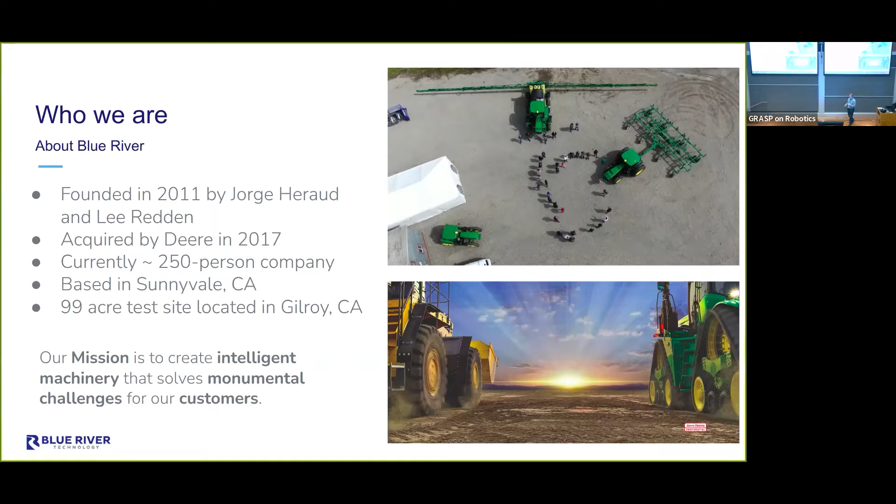I won't spend much time on this — it's just to give you a sense of Blue River. When we think about smart machines, we do a lot of sensing, decision-making, acting, and then learning also. So we do a lot of calibration, online calibration, validation of our work, so that when you spray something, you want to know, did it work? We've done a lot of work in that area. So it's this very big feedback loop with smart machines and data at its center.

Underlying all of this, probably no surprise to folks here, is computer vision, robotics, machine learning, deep learning — some of our core strengths and core focuses.

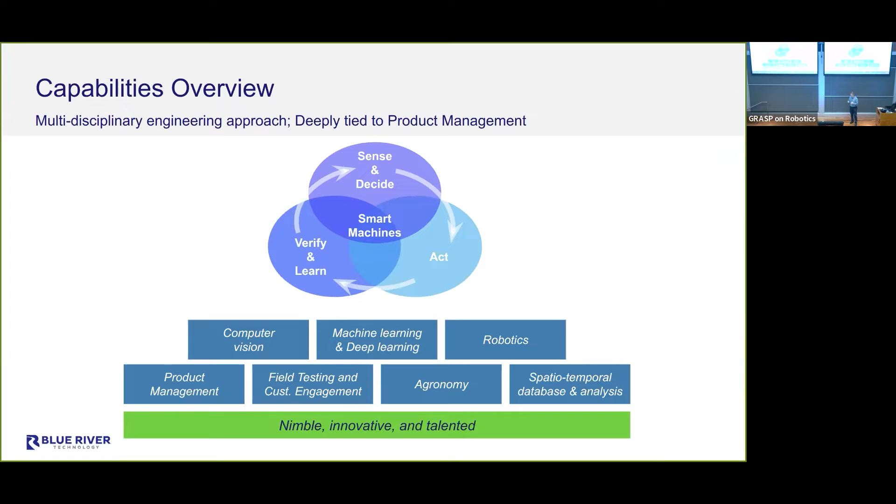But I'd also want to tie in one of the big things that I think makes us work well: product management. I don't think people think about that as much from an academic perspective, but in business and in developing these products, there's a very strong partnership with product management, who are kind of the voice of the customer, and the engineering side guiding that. That's been huge, and I think even for startup companies, it's one aspect that sometimes gets missed — having really good ties into product management. We also have field testing and agronomy, folks who get out in the field and understand the customer. We try to be very nimble, innovative, and talented. This is the group that we target.

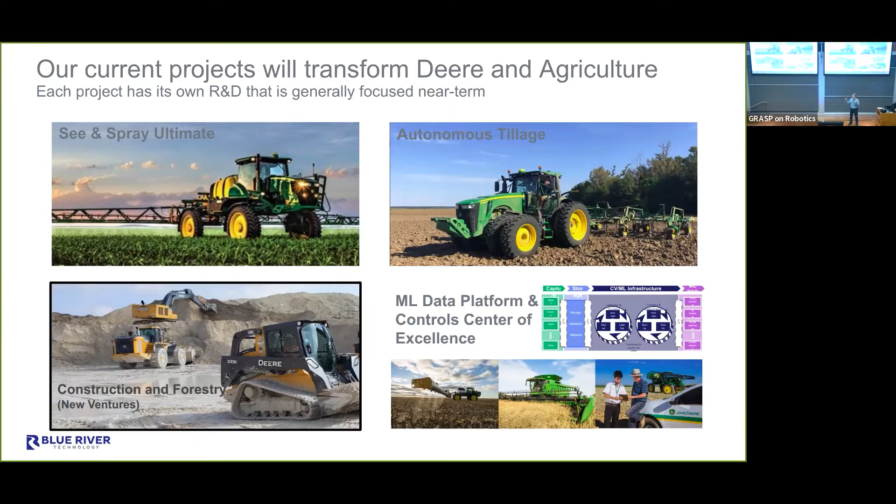Just to give a rough sense of what I want to talk about today: See & Spray Ultimate is a new product about spraying, and I'll go into more depth on that. Autonomous tillage is an actual autonomous tractor doing tillage, and we're getting into construction and forestry. I'll give some insights into that. All of these are based around a machine learning data platform and a controls center of excellence we have at Blue River. Machine learning is core to what we do, and the data infrastructure piece, while I won't go into it today, is really central to everything.

So let me jump into the first project I want to talk about: See & Spray Ultimate. It's a new product that we're releasing.

Before I dive into that, I want to talk a little about why agriculture, what motivates us to work in this area. Obviously, it's the food we eat - whether directly or indirectly, the food comes from agriculture - and the clothes we wear very often. Things like cotton are one of the big farming output products we work on. There's also the challenge that as population continues to grow and people move away from rural settings, we need to increase farming productivity.

Studies have predicted, and you see different numbers thrown around, that we may need to double farm output by the year 2050. But there are huge challenges to that: labor shortages, an aging farm population. The top right graph shows statistics on the aging farm population - people working in agriculture are getting older and older. There's also a shift away from working in agriculture and living in rural areas.

This bottom right graph shows some interesting trends. The blue line is the population of farm workers, which peaked somewhere around the 1920s-1930s. But as a percentage of the population, it's gone from 70% of people working on farms to, the numbers are hard to get exact, around 1 to 1.5% of the population working on farms. So you've got a massive drop-off in the number of people working on farms, and the amount of farmland isn't changing - it's been almost static for the last 20, 30, 40 years. So you don't have this easy way of increasing productivity on the farm.

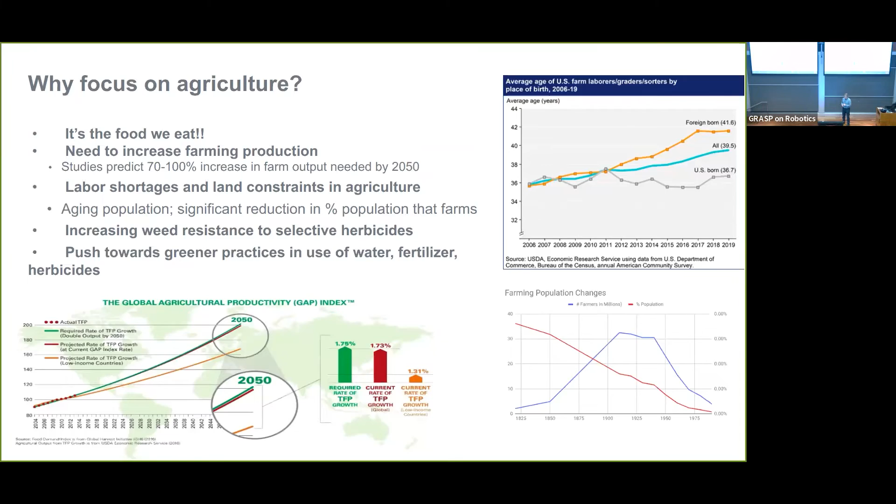So just to give you a sense of what happens today: the current standard practice for getting rid of weeds is genetically modified seeds combined with spraying the entire field - called broadcast spraying. You take a sprayer like this one and broadcast your herbicide everywhere, designed to kill all the weeds. The plants are genetically modified to be resistant to the sprays, so they survive, get knocked back a little, but for 20 or 30 years, this has been a really effective way to control weed populations.

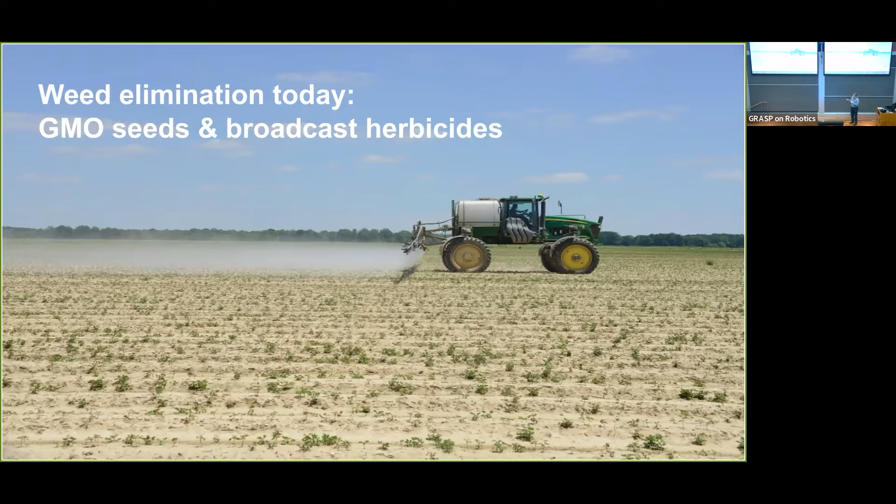Getting rid of weeds is important because they compete with your crops. But what we're seeing is huge growth in resistant weeds - through evolution, and sometimes through ineffective application of the materials, weeds are becoming resistant to the herbicides too. To walk you through this: in 1995, there was a handful of states that had these weed problems. By 2005, it's about half the states.

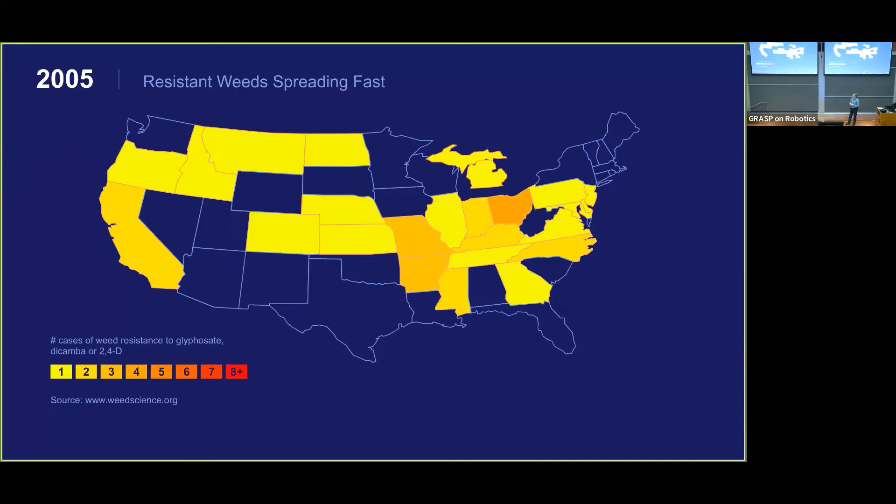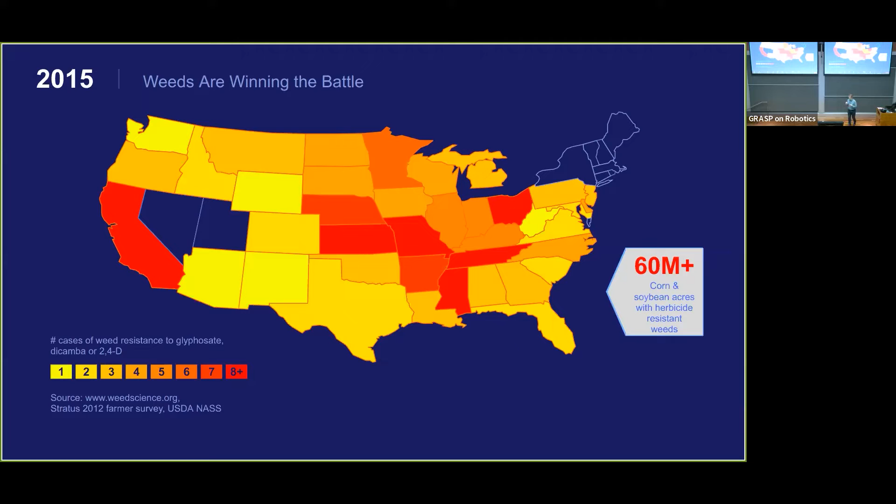In 2015, almost every state has these challenges. The hot spots, especially around the Delta in the southern region in California, show that this is just becoming a huge problem for farmers.

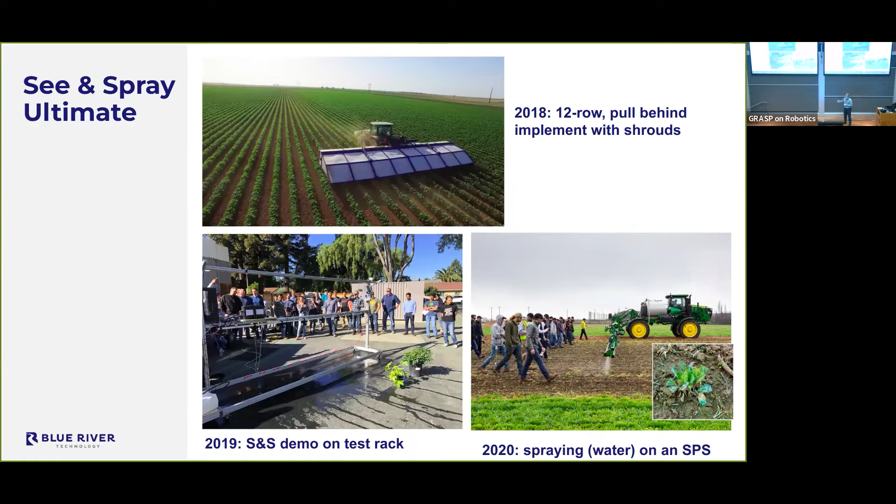It was pulled behind a tractor. By the next year, we were demoing something without the hoods, to be able to deal with sunlight and shadows. The next year, we were on a sprayer, no hoods again, spraying water and testing it out. And then we're now launching this project. It was launched earlier this year. It'll actually go into market early spring next year.

To give you a sense of the scale, this is a 36-meter wide boom, so roughly 120-foot wide. It drives at 20 kilometers per hour, so 12 to 15 miles an hour. It's got 36 cameras, one every meter, and 10 NVIDIA Jetson Xaviers, so a lot of horsepower on this thing.

They all had to be hardened, and that's also been a big project. Rujan was actually asking me earlier about whether we make our own hardware. Yes, we buy those chips, but we have to build the hardware that lets it survive in these types of environments. Our cameras too, we build those internally. It's also got a dual spraying solution, which is kind of cool, but I won't dive into it. It allows you to spray two different applications at the same time.

The thing that I really want to emphasize, though, is what we had hypothesized and what we're proving out: we see savings of anywhere from 50 to 80% of herbicide usage. So we're keeping that from being sprayed on the crops, on the ground, everything.

Great, how do we control the spray? There are nozzles that are solenoids that turn on and off. We determine when to spray based on vision, it's all computer vision. The amount is controlled through a solenoid that has a little nozzle tip, just a little actuator that turns it on and off, and then it sprays out of a nozzle. I have a quick video that maybe you'll be able to see.

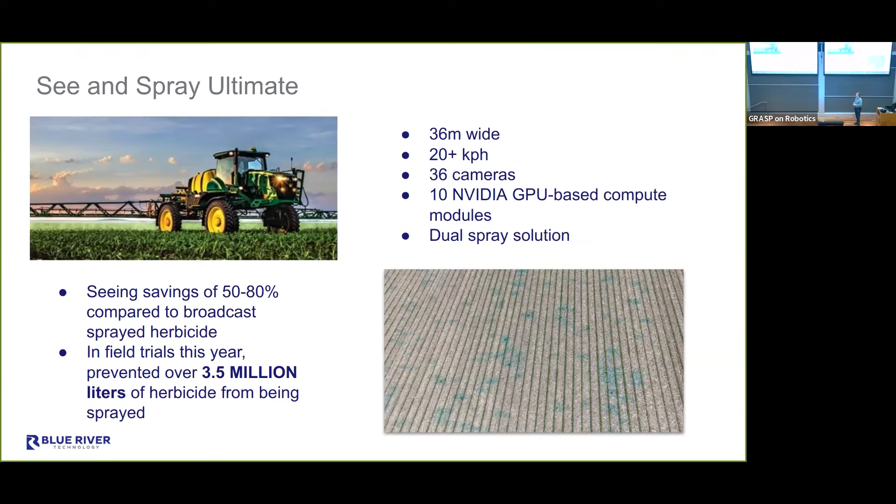You can't just do machine learning. In fact, I feel like most of our time is not necessarily on machine learning—it's a fraction of what we spend our time on.

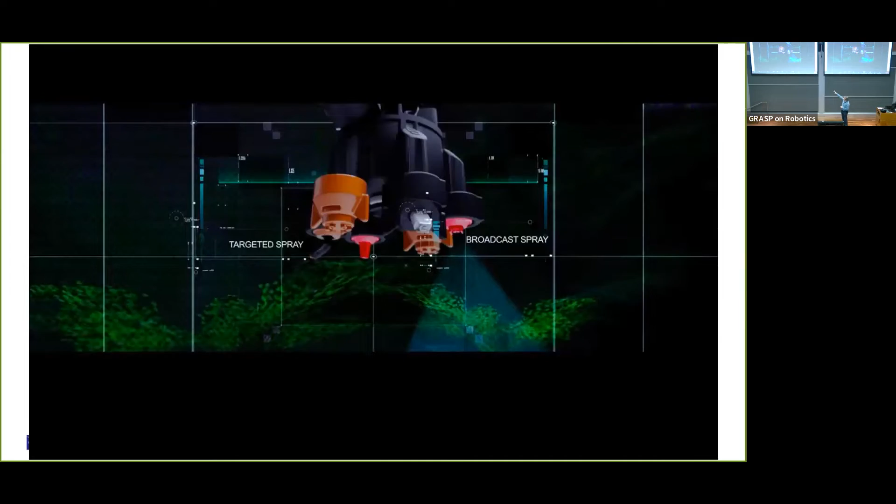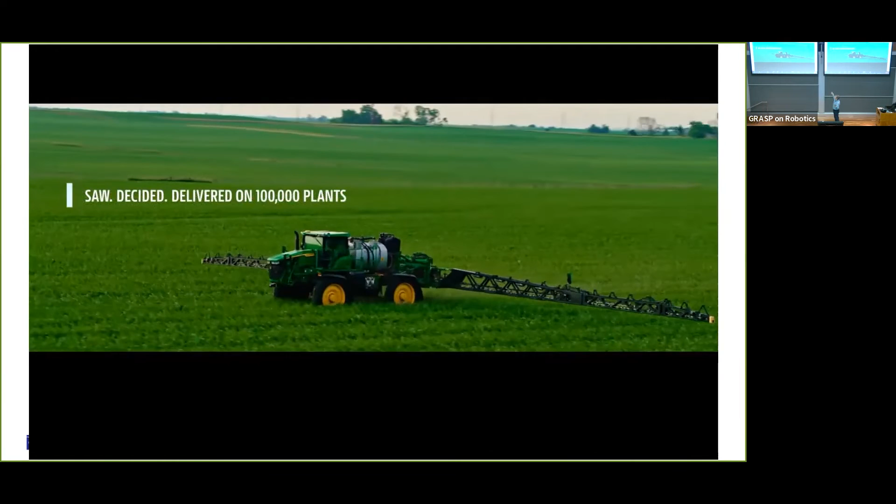This is a pretty quick snippet of video, but I wanted to give you a sense of what this looks like in practice and the scale. If you blink you'll miss it, but I wanted to show what the spraying looks like—this is it as the nozzles turn on and off. And I wanted to show the scale of the machine: it's a 120-foot wide boom moving through the field.

So let me talk about the tech stack some. This is why we're here—there's obviously not a lot of equations here. I can't publish all of the internals, but I wanted to give you a sense of what this looks like and some insights there.

We have this thing we call the See and Act Pipeline, SNAP—it was a little bit catchy. See and Spray is what we typically call the product. This SNAP pipeline has to run within 120 milliseconds total, glass to glass, we call it—actually, glass to ground in this case, from the time light enters the camera to the spray hitting the ground.

Actually, I think that number is when the spray is controlled and sent—it's another 70 or 80 milliseconds for the spray to hit the ground. So you can imagine all the compute we have to do is on the order of the same amount of time it takes for the spray to reach the ground. That's the compute budget we have.

A couple things I want to highlight: this is a flow chart of what happens, but we're doing full boom pose estimation—in real time we measure through GPS, IMUs, and ultrasonics the pose of the boom, so we know how high it is relative to the plants, because that controls timing. We're also doing inference on NVIDIA GPUs, mapping out where the plants are in real time, and controlling for a single compute module—there are 10 of these, and they'll control between 24 and 48 nozzles each.

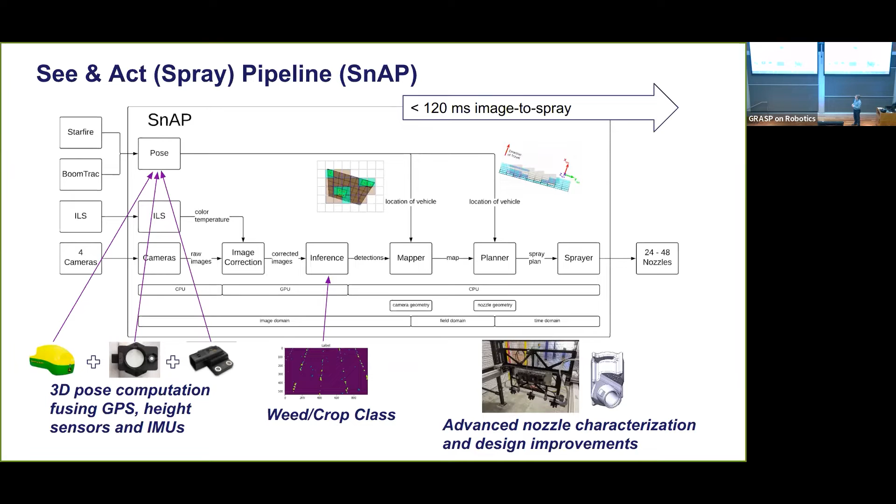It's a deep learning architecture—we couldn't do this without deep learning, I'm pretty convinced of that. We tried about 7 years ago to do it with traditional methods like SVMs, but the performance levels we got just weren't there. We couldn't get the high performance needed to detect all the crops, detect all the weeds, and then segment them from the crops.

A couple things to call out: it's what you'd expect—an image comes in, and we use a pyramid-type network that's not overly deep, 19 convolutional layers. I wouldn't say it's a very deep network, but it runs very fast, 8 milliseconds per image. And we have a training data set of over 300,000 labeled images at this point.

And they're all semantically labeled at a pixel level. So there was a big effort there to get that going.

I haven't talked as much about data collection. I'll talk more about it in the next project, but this isn't like 300,000 labeled images from a single field. We want diversity here, so this represents images from probably over 1,000 fields. We try to capture anywhere from 200 to 500 images per field, so it's probably closer to a couple thousand fields we've gone over.

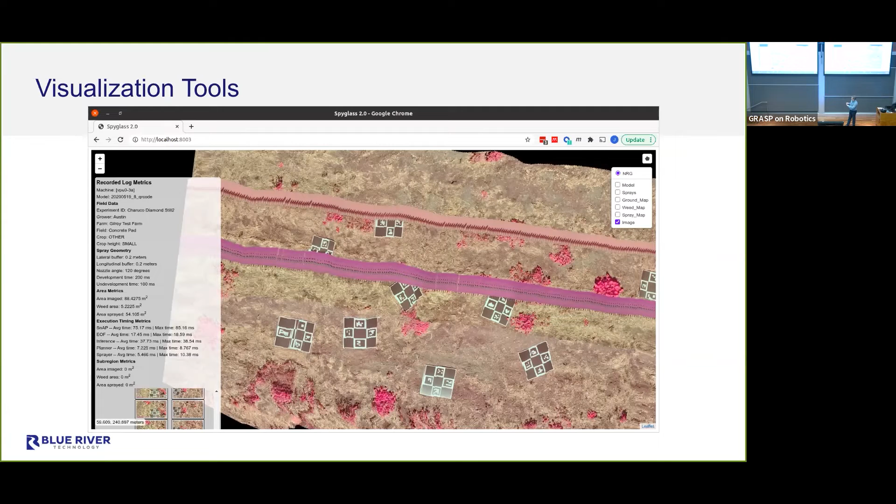We also built visualization tools. This is just to show—each image probably only covers a couple meter by a couple meter area, but what you can see here is probably a 20 or 30 meter by 20 or 30 meter snapshot of what the robot or machine is seeing. You can get a sense of the little tick marks along the pink and purple lines—those are actually images stacked on top of each other, just off enough that you can see the difference. You can see probably a couple hundred images going across there, and as you pull together what they're seeing, they're all stitched together to make sense.

Another thing that's been really interesting—we figured, hey, we've got this deep learning network, what can we do with it? Call it multitask learning, but that's a glorified way of saying we're going to pull a couple other things out of it. In this case, in addition to having our encoder that extracts and consolidates the data, we'll pull out whether there's too much dust in the image, too much blur, or too low light. So it detects image quality issues at the same time as it's extracting where the weeds are and where the crops are. That's nice because we've got the data and this machine learning model already doing all this work, so let's just leverage right on top of that.

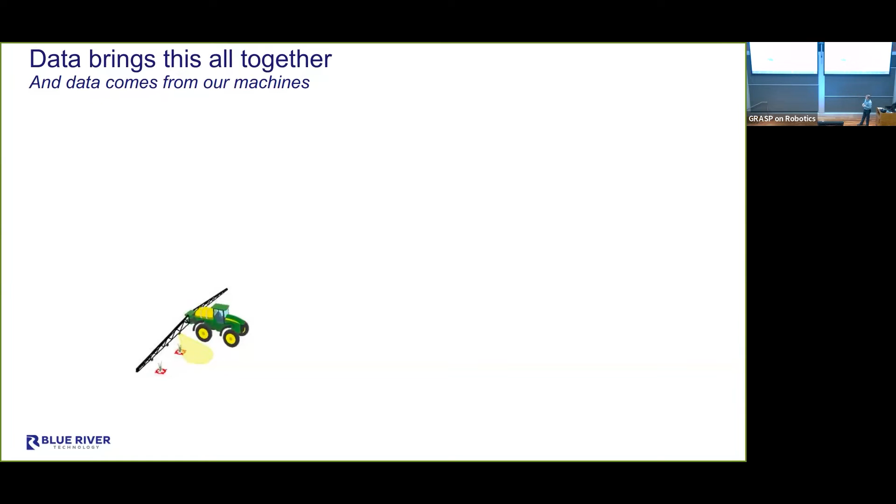And I keep mentioning data—the one thing I love about where this work goes is that data continues to make this product better, and not just this product, but other products. If you think about it, we're doing spraying today, and we can leverage data capture across a whole fleet of machines to get better and better and look for where there are problems.

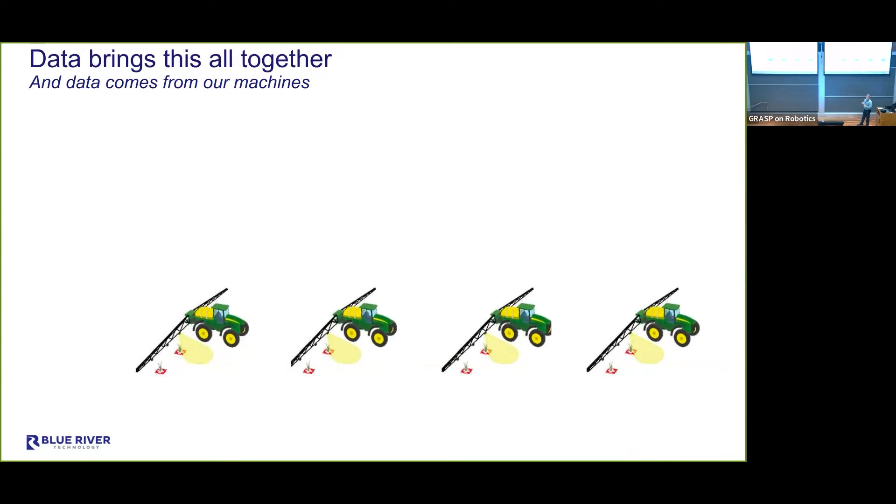And we can also then start to use these machines, which will go into the same field multiple times. So we can start to measure our performance, the first application versus second application, see how we did and get feedback that way. But Deere also has this whole fleet of machines doing other things. So planting, tillage, harvesting, fertilizing. So you've got this ability now to measure across an entire chain of the agriculture production process to see how each step is impacting the next and pull that all together all the way through harvest, and do that again on a large fleet of machines.

So the data, the ways in which you can use data, and we're starting to really expand on the data science aspects of what we do. It's just enormous, great potential. Okay, so that was See and Spray. Let me switch gears to talk about this autonomous machine and autonomous tillage.

So the data that you mentioned, am I right in assuming that you haven't open sourced it? No, we have not. Yeah, I do get that question a lot. I've had that fight a lot internally. I would like to. No. I mean, the simple answer is no. And I think, yeah, it's been a challenge.

I think we're continuing to look for opportunities of how we might do that. As you can imagine, maybe this is a little bit implicit, but I'll say it explicitly, it's this balance between having this data as a distinguishing factor in our systems versus wanting to get it out to the community and share it. And so I would like to, but we have not yet.

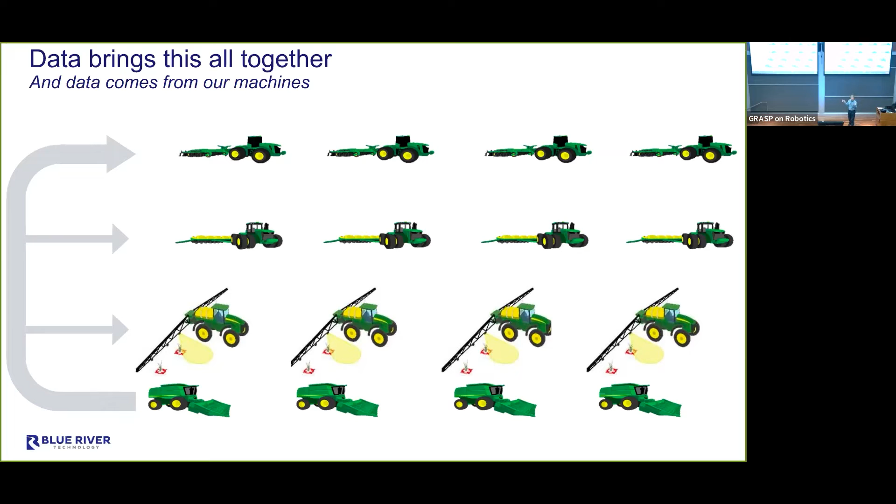Okay. All right. So again, let me jump over to autonomous tillage. I think this is also a really interesting area. In tillage, and maybe again stepping back, sorry, sometimes I forget that I'm so immersed in this. Tillage is an operation. Generally it's pulled behind a tractor, and instead of the single machine, it's got a tractor that pulls what's called an implement, usually some type of plow, in this case a chisel plow, that goes through and tills the field. It usually has some operations that help clear brush out, and then turns the soil and gets it prepared for planting for the next season.

We've chosen to start in tillage, and I think this is just interesting. If people are thinking about a product and how to approach product management and product marketing, tillage is interesting because it's a valuable operation for autonomy. It's a valuable operation that farmers need to do, but it happens roughly at the same time as harvest. So if you think about labor shortages, if they've got to choose between harvest and tillage, they're going to do the harvest every time, right? You've got to harvest your crops.

And so tillage is very often this thing that either gets lost or missed, but the farmers want to have, or they put their least skilled labor there if they can find it. It's also just a simpler problem around automation and autonomy. There's not plants in the field generally.

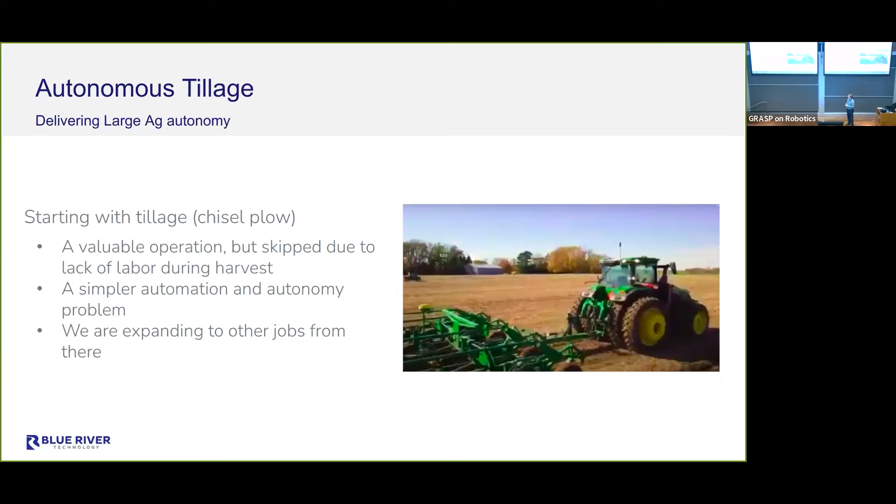I kind of mentioned this earlier, but it was announced at CES this January, and we're launching it and it'll be available as a product on Deere machines. Again, this is all through Deere this next spring for model year 23. These are just some pictures to show you what it looks like running. I'll show a video in a second. I love this one on the bottom right, which is how it operates at night, because they operate very often at night. So you can see the lighting patterns that go on there.

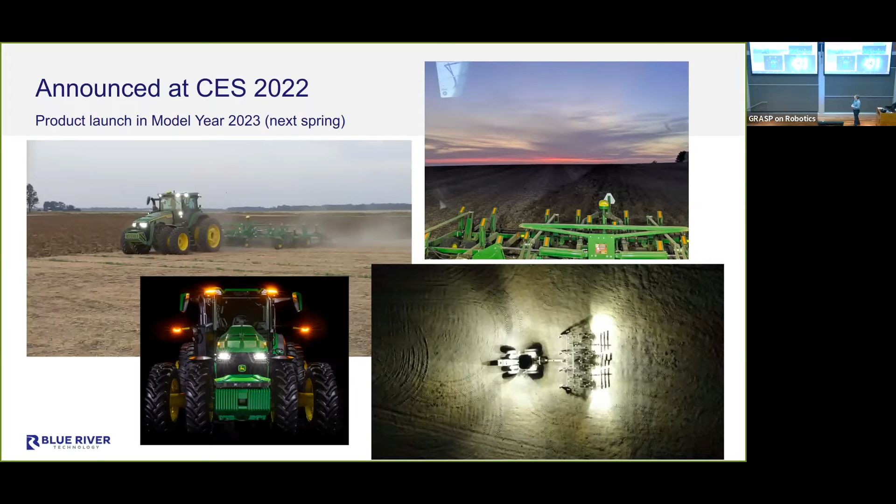And then I mentioned data collection, and I thought this was a fun picture to show. These are some of our data collection rigs where we've retrofitted a Gator, which is just a golf cart type vehicle, to be able to collect data. What's interesting about this is they need to be able to compress down for shipping, but then they transform out to have the cameras and the lights and everything placed where a tractor would have them. We nickname them transformers, where they can extend out and collect data. That allows us to get into lots of different fields, lots of different situations very quickly, rather than trying to bring a tractor to every field.

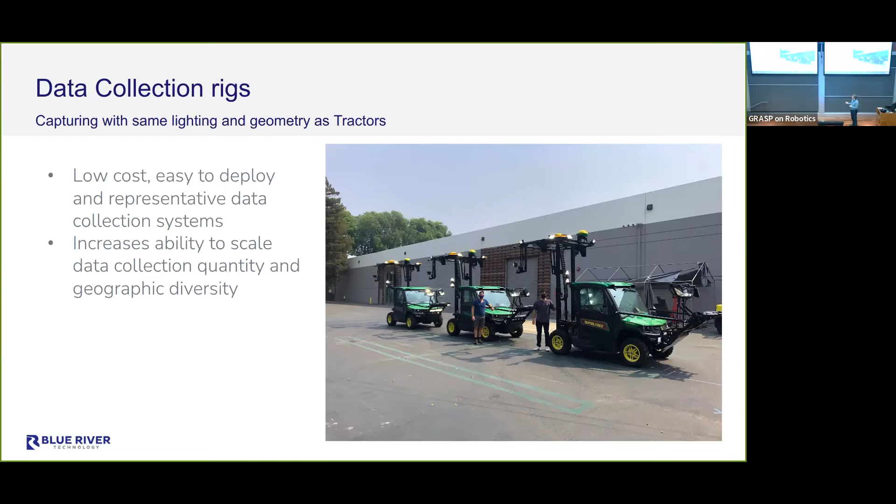And we've done this to collect data with See and Spray, even with just backpacks, people wearing backpacks walking through the field. But that's been a big effort of ours, to be able to collect data quickly in a diversity of geographic locations.

How do you supervise that model? Yeah, so the original versions were actually supervised by the stereo depth. But now we use unsupervised methods that use the estimated disparity between the stereo pair to train the depth model. So it's an unsupervised method.

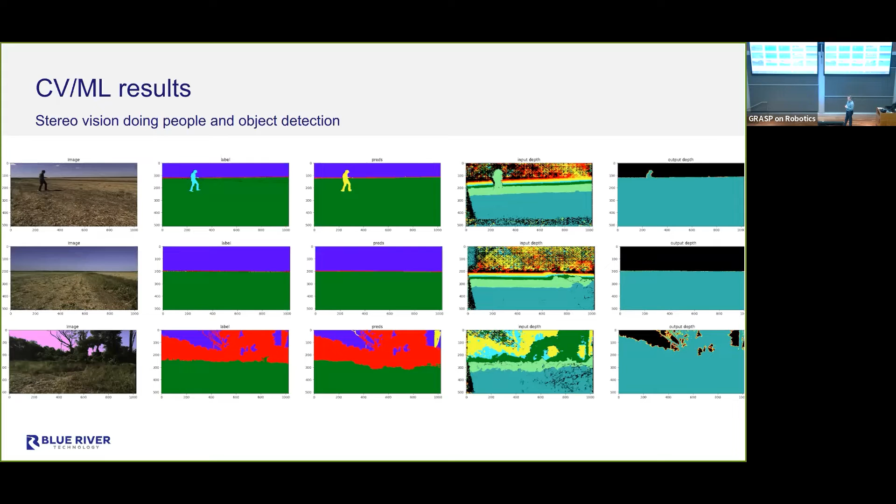There's a couple exceptions to that. One that still makes me laugh is bugs. Bugs come flying by and they get lit up by the camera and they look like an obstacle. So dealing with that has been an interesting one. And then dust. Glare that you get from dust can be a real challenge at night. So we've done a number of things to work on that and improve it.

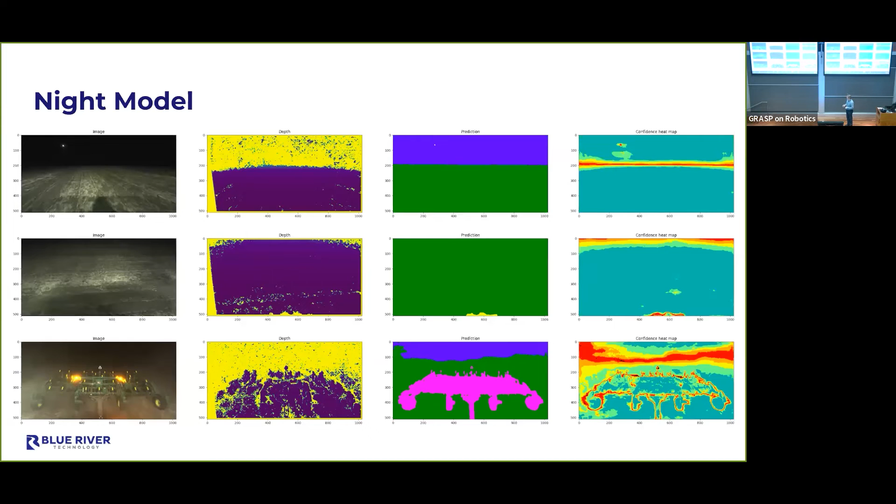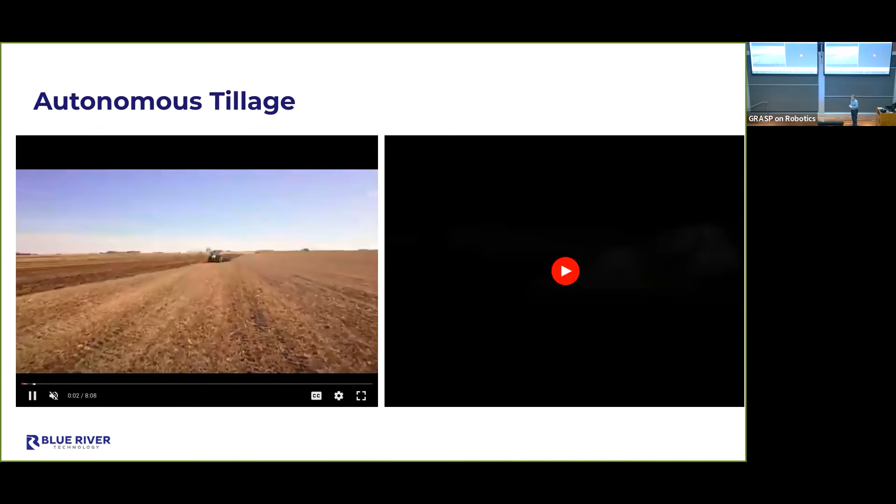And then just to show a couple of videos of what this looks like as it's running. It's actually kind of dull, and that's always the funny thing about autonomous systems, especially in farms. It looks just like a regular system, but there's just not a person in the cab, right? You just can't tell the difference.

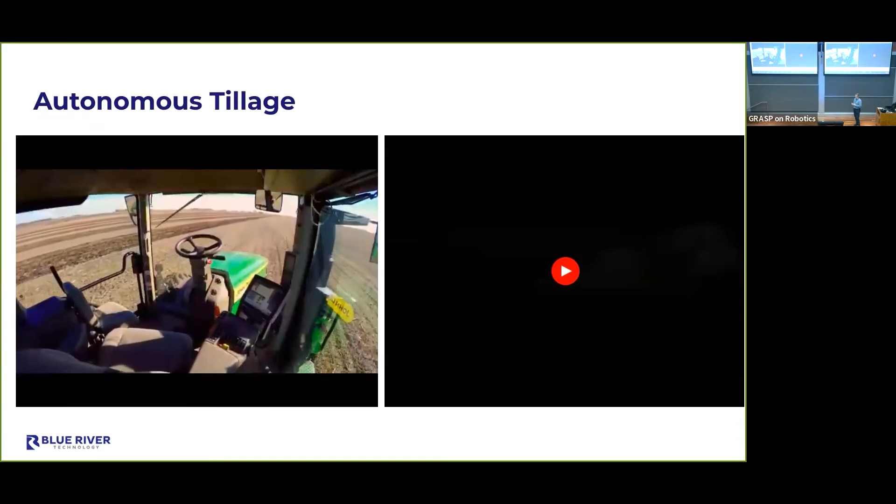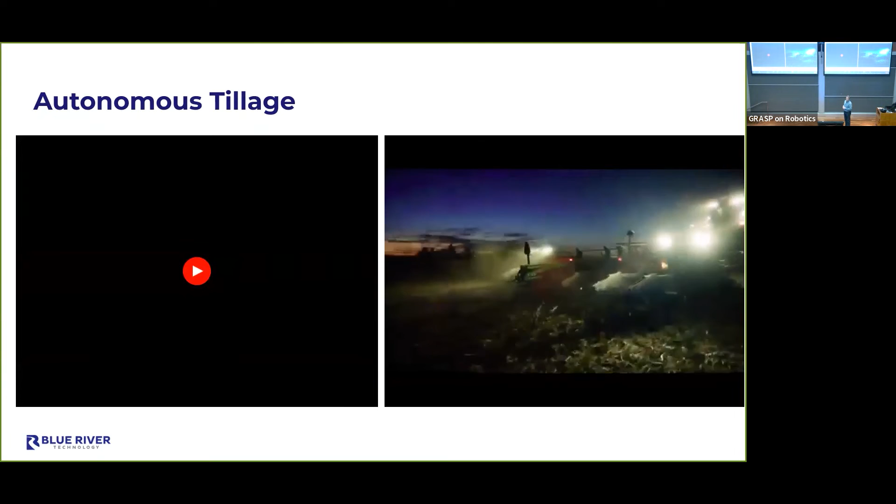So that's it running, and here's it running at night. You can see kind of how dust can be an issue there. Just one thing, and so dealing with that, figuring out how to do the lighting properly has been an interesting challenge, and we've incorporated a number of things to help reduce the dust, but also just understanding how to handle exceptions that get thrown when those happen. Start there.

How do consumers feel about the autonomy there, especially because machine learning has a reputation of not being understandable? You're not in the weeds with that technology y'all worked on. I'm sure you have plans and thoughts about this, but I'm curious what you've done to develop trust that they would want this technology, despite the fact that they may...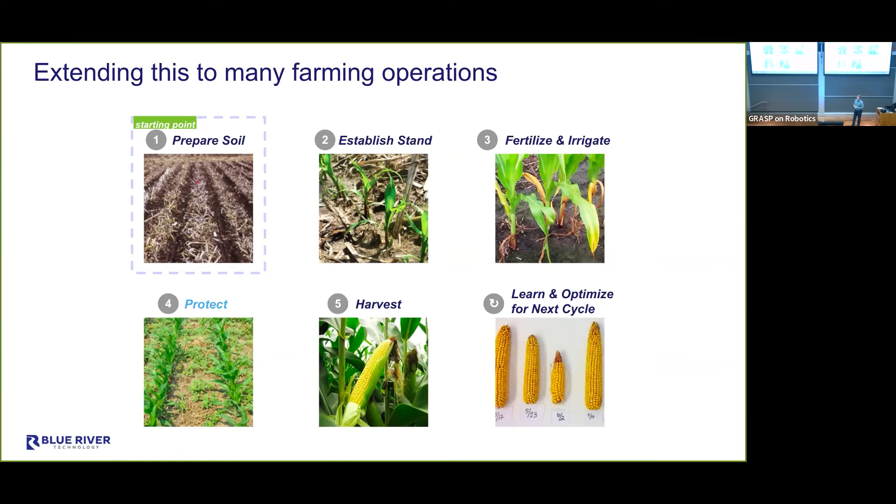The scenario we have that's our number one guiding scenario is someone got drunk, fell asleep in the field, and is in camouflage. They're laying down in a field in camouflage, and you're driving through that field. These accidents do not happen when a human driver is at the wheel, hopefully. Finding data on accidents in agriculture is really hard, but that's the idea.

Okay, now I want to switch gears completely and talk about something that is not going to market. This is one that I need probably a whole series of disclaimers to say, please don't do this at home. Don't try this. This is not something we're marketing, but it's fun, so I figured I'd share it. This is what we call a balancing skid steer.

It's one of the things we've been looking at in construction. It's a control project, so it's kind of fun that way. We've taken two approaches to this, and I want to run through both and compare and contrast a little bit: a deep reinforcement learning approach, as well as a model predictive control approach. So there's these two approaches, just to explore the space a little bit.

I probably should have showed the video first, I'm realizing, but anyway, I'll get to that. I want to give you a breakdown of what we've worked on here. We're using neural networks in two ways in this system.

One is to help us simulate the system and take something that's very nonlinear and help in the simulation. So we've done more physics-based modeling to get a primary base model, and then built a neural network effectively around that, especially around the controls and how the controls translate into action on the machine, to build a better simulator. Then we took that to train a controller, again this reinforcement learning based controller, that can control the machine and do the sim-to-real transfer.

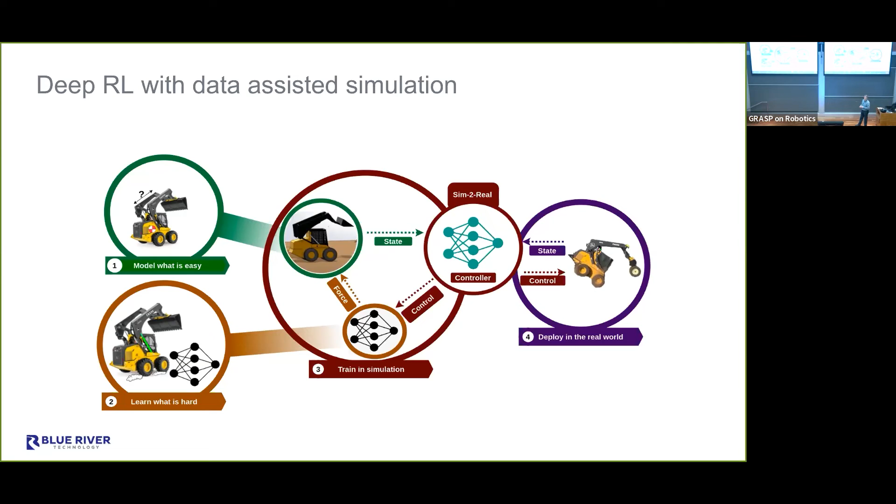So transfer that out to the machine. I've been really struck by how effective that's been. Once you get a good simulator, the controller transfers really well out to the machine. I'll talk a lot about that in just a minute.

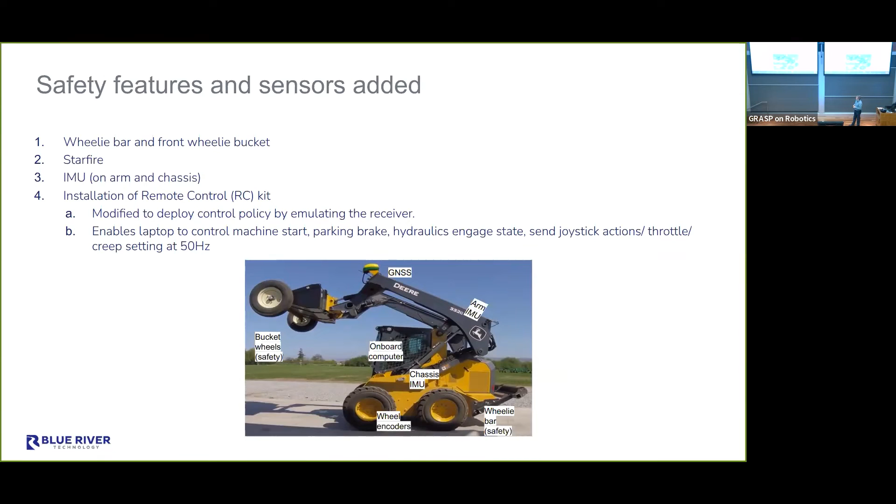We obviously had to modify the machine slightly. This is called a skid steer loader. It's compact, like a Bobcat if anyone's familiar with those, but this is a John Deere skid steer loader. We added a wheelie bar so that as this thing tips back and does a wheelie, it doesn't fall over, giving us a little safety on that side. We also replaced the front bucket with a set of wheels, and added an IMU, GPS, and a remote control kit so we can control this thing remotely.

I mentioned we do kind of a physics-based model. What's kind of fun is finding the inertial parameters on the skid steer. We had to balance it up, put it on a truck scale to find the center of mass and some of the inertial parameters. Then we built it into a simulator, just a physics-based simulator.

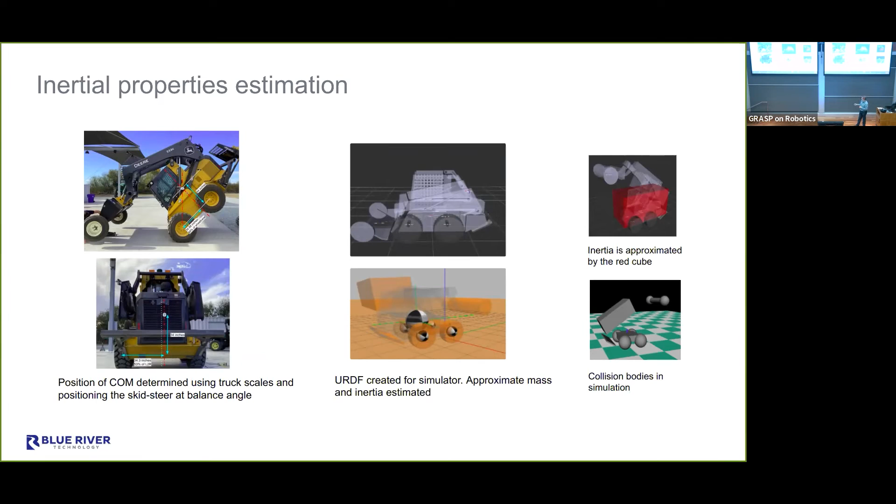We use RaiSim in this case because we're working with ETH Zurich. I should say this work was done with Lee Redden, one of the co-founders, and Marco Hutter out of ETH Zurich, who was also working on this. So it was a collaboration with those guys.

We then collected data around the actuator control and focused on the nonlinear areas that happen when you try to drive this machine, between what you command and what actually happens on the machine. So we ran it through essentially a sweep of inputs to test the input to wheel speed, wheel velocity, wheel speed state, and then built a neural network that could simulate that—that was the nonlinear area we wanted to capture. We then had to put a controller around the simulator to properly have it take wheel speed as a control input and drive the simulation to model that.

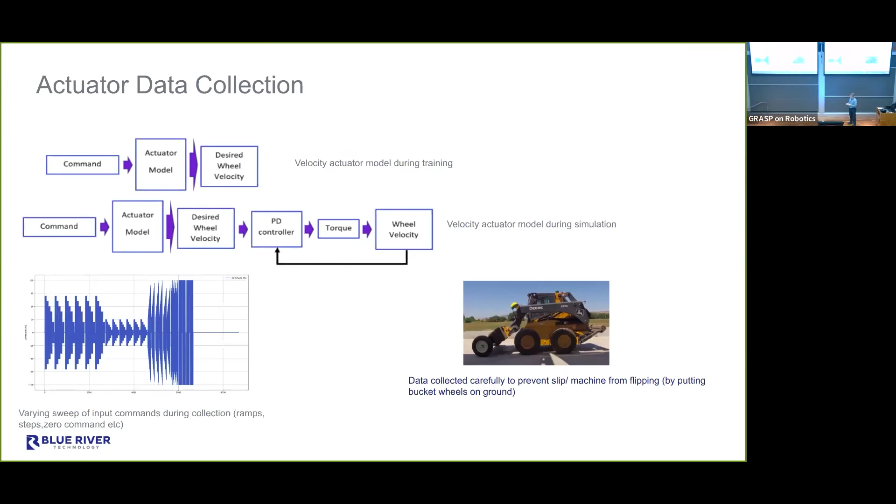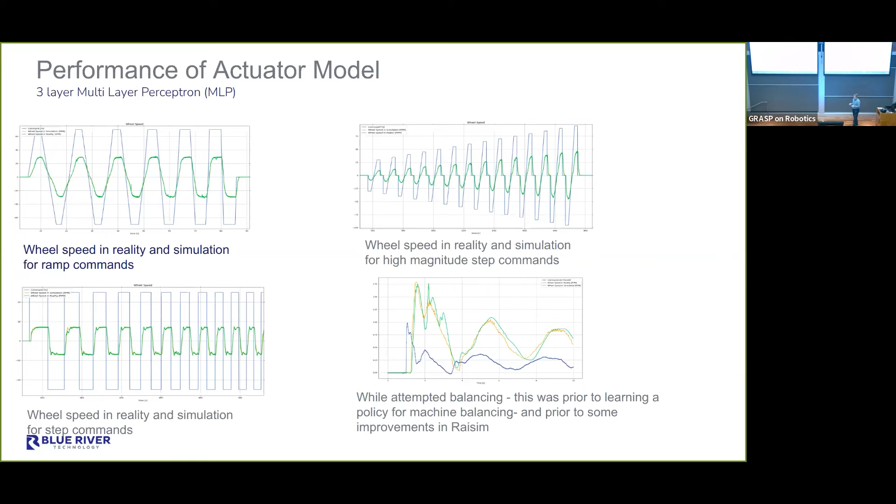This isn't a very exciting graph, partly because the simulator sits on top of the measurement. The blue lines are the control signals coming in, the green lines are the measured action, and underneath is a set of orange lines showing what the simulator said. You can see they sit right on top of each other in most cases, which was nice.

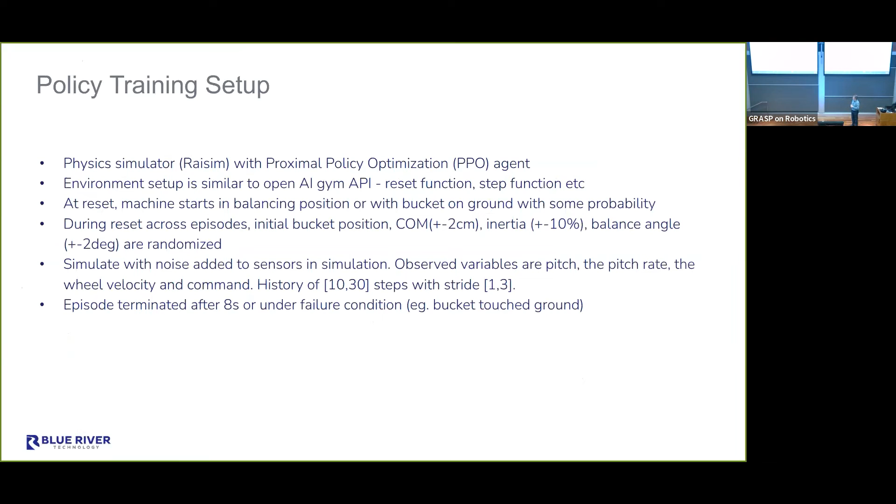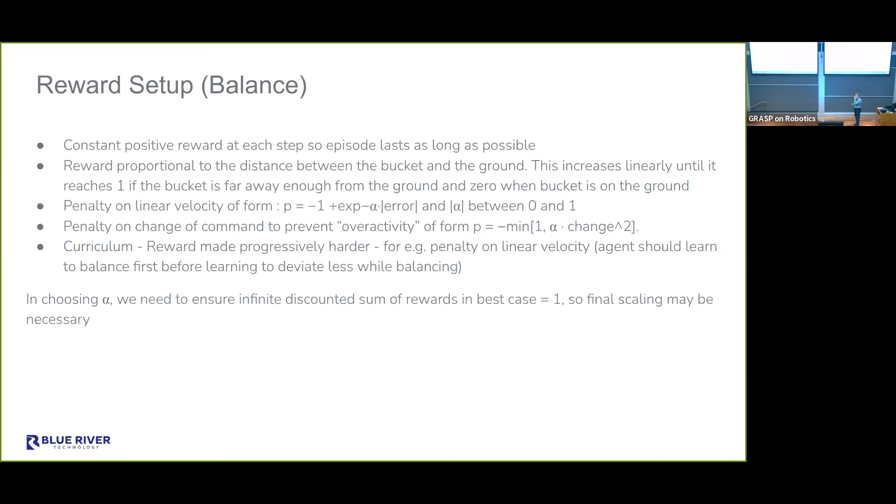We used this reinforcement learning setup, using PPO, proximal policy optimization, with the simulated environment. Over each episode we'd randomize some of the variables to give it robustness, adding noise and things like that. Building up from having it control the system to balance itself, to putting penalties on motion, control effort, and how much the control effort changed. Pretty straightforward in some ways, but obviously a challenge to get working.

Tying this all together, we have this controller able to control the system. One note is that the controller doesn't work from sitting on the ground all the way to swung up, so we had different policies trained for each state: getting the machine upright, and also landing it softly so it didn't destroy itself on the way down. Those are handled automatically by the system, but they're different controllers.

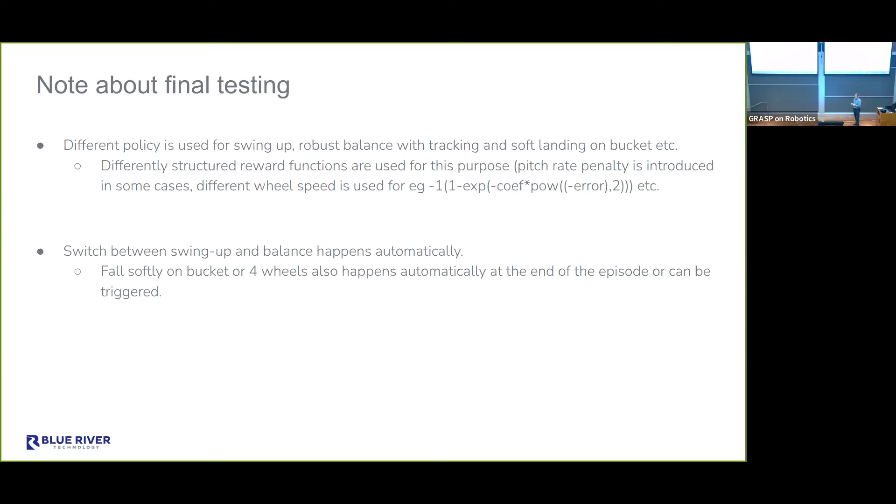Now just to show you what this looks like. On the right, I'll start this one up. This one's kind of fun but it's a longer video. We had it trace out on the field the word 'hello.' It's going to run for a while, and I wanted to show you how this thing pops up and gets into place. That's one control policy.

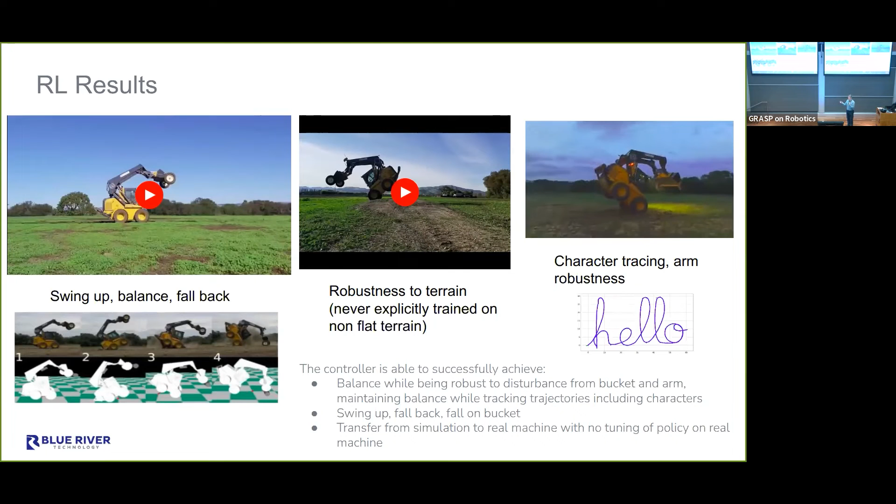Then it'll drive around, and maybe because that one's a little dark, I'll show this one instead. That will do basically the same thing, and it just kind of pops itself up.

Again, do not try this at home. There are no operators in the cab, and that's very important.

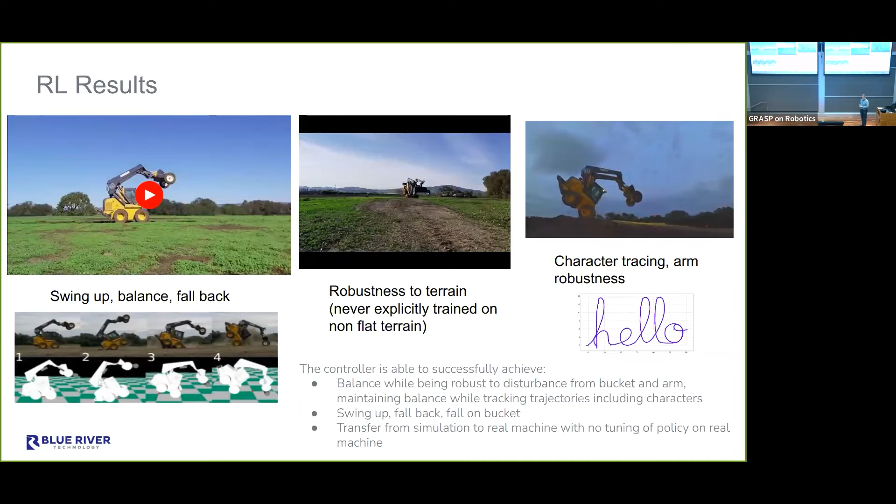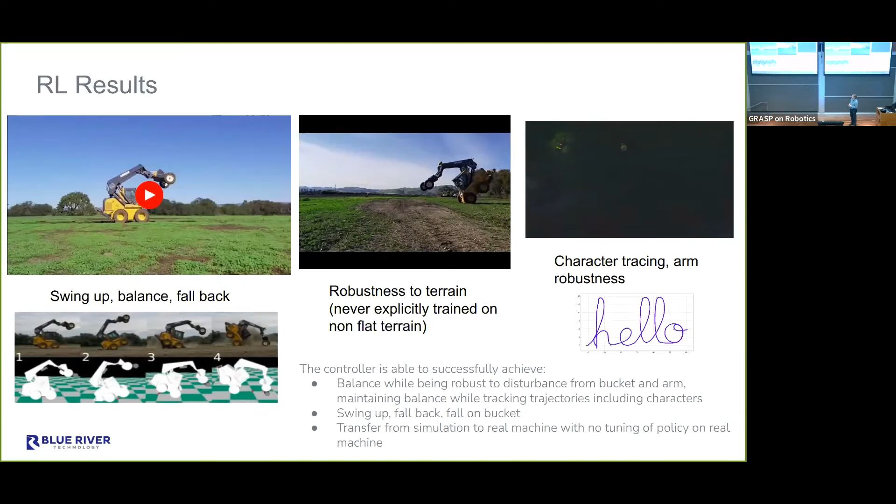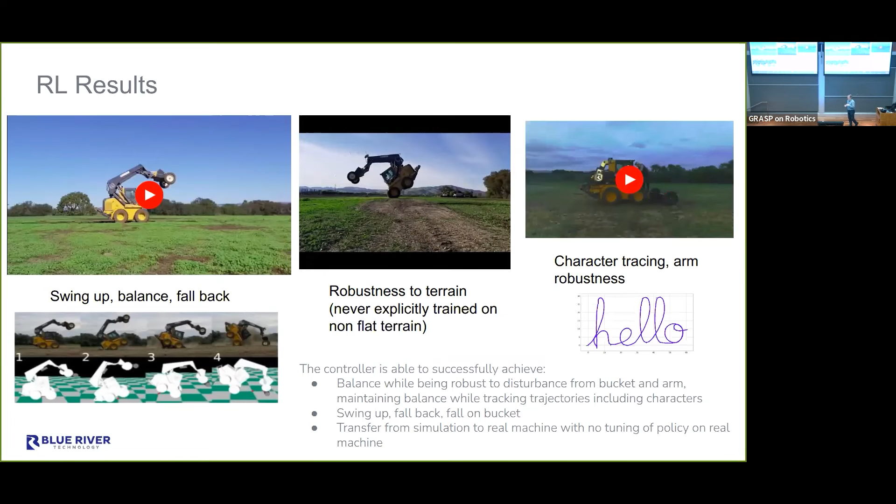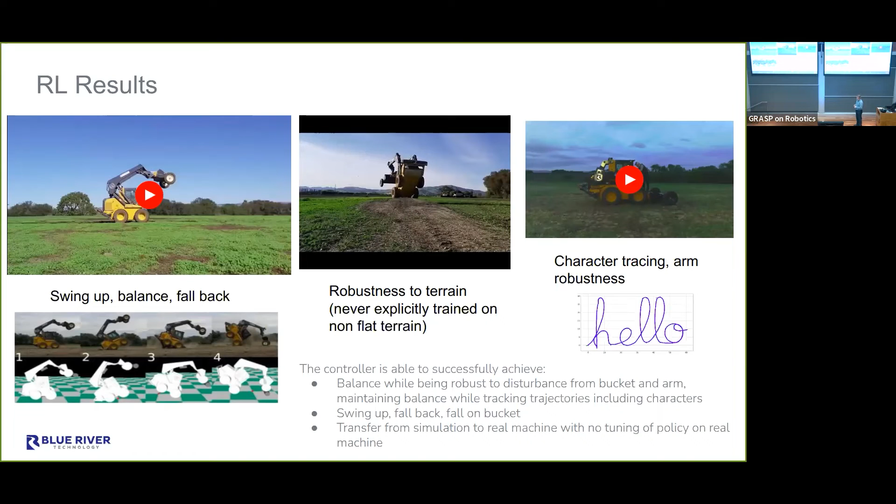One last point I want to emphasize is that the transfer from the simulation controller to the real machine had no retuning—it just transferred over. It's really pleasing to see that happen.

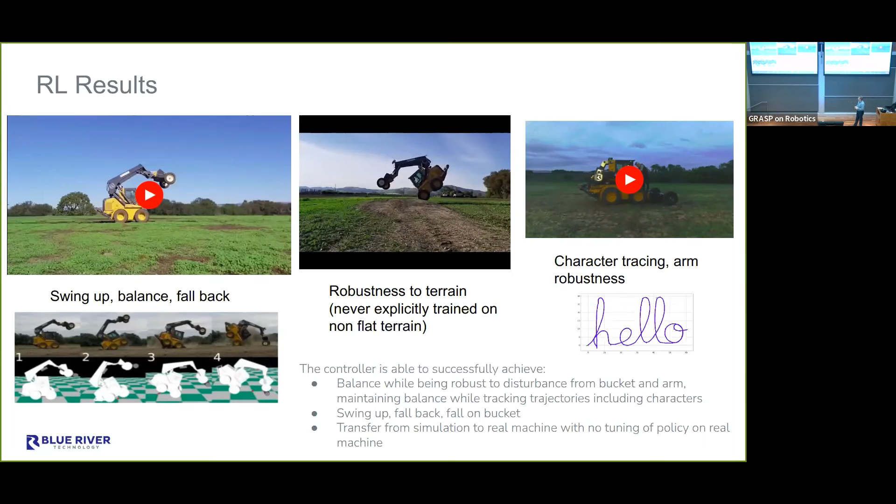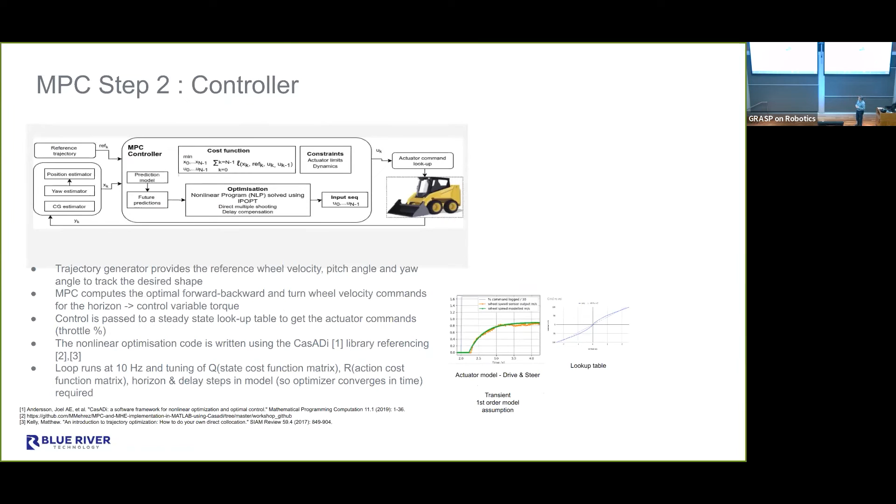I'll go through this quickly since we're running out of time, but the model predictive control approach is another approach we've taken. This requires a more thorough dynamics model to build out for the MPC, so we did quite a bit of modeling for that. We built the controller, which has a standard kind of optimization cost function that works on a fixed horizon, and it's able to build this controller for the same type of situation.

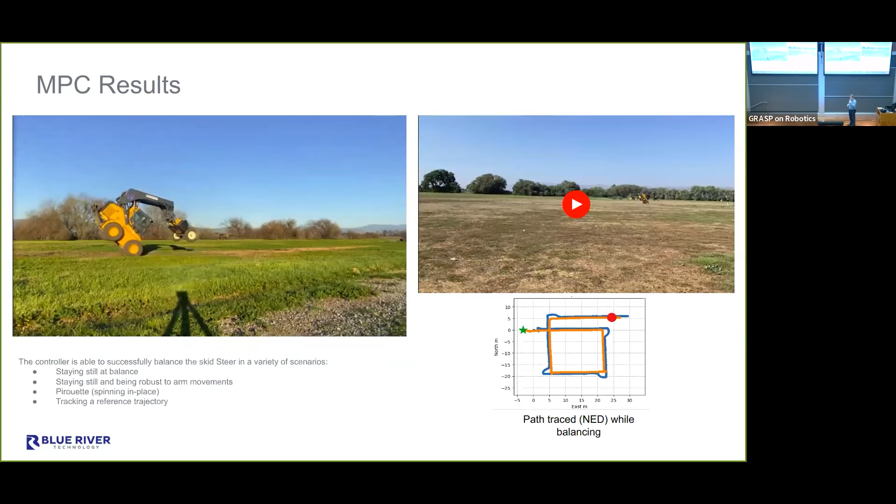Just to show some quick videos—they'll look very similar. This one starts in a slightly different position, but the idea is it's able to pivot up and control it, and you can do things like spin it or translate it. The second video shows the machine tracing out the diagram below, and you can see how that runs.

Yeah, so very dynamic system. I think I'll keep moving on with that.

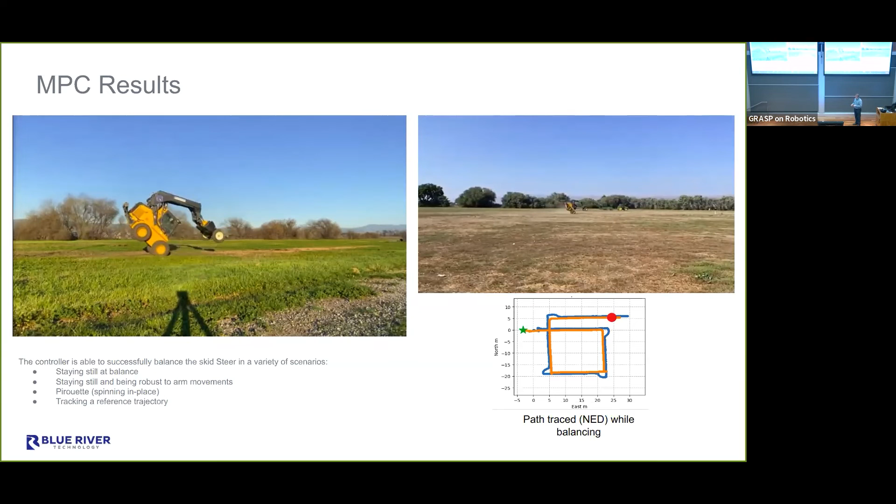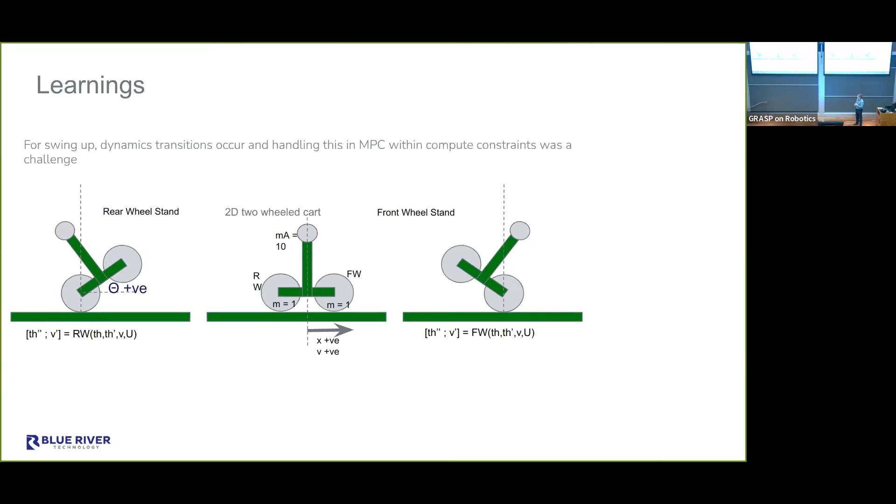Just to talk about some of the learnings from dealing with these types of systems and these two different types of controllers. Maybe to start with, MPC is great for dealing with balancing the system, but was much more challenging when the dynamics change. So having those dynamic constraint transitions proved to be a real challenge, and we weren't able to solve that, to be frank. Not that it couldn't be solved, we just weren't able to get there.

The reinforcement learning controls weren't as smooth as the MPC, and it could be just how we approached it. We added some first order filtering that got it much better, but just out of the box, it had that issue. The reinforcement learning was great for transitioning to slightly different tasks, but related.

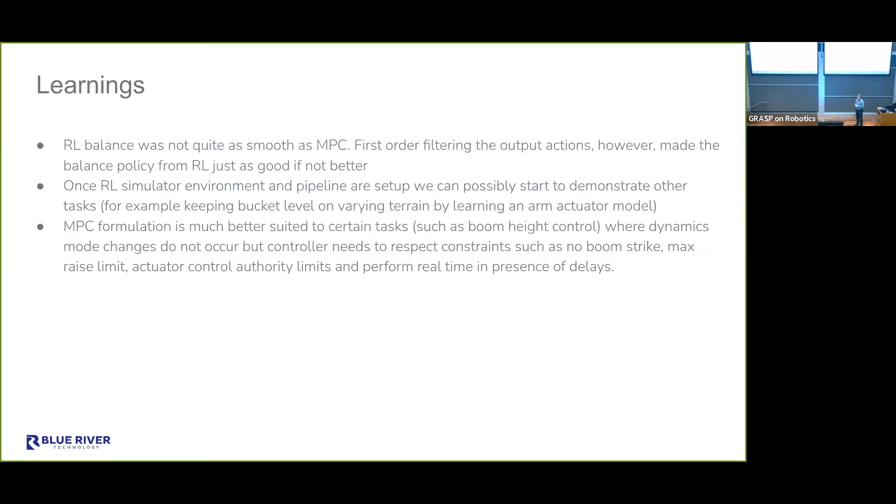So if you had the same model, but you wanted to control the bucket height or do something that was related, it was really nice for transitioning that. Where MPC wins in some ways is if you needed to add real hard constraints, limits that you wanted to enforce, that's much easier to do with MPC than it is with the RL. Just some comparisons there.

That's kind of those projects I wanted to mention, just looking forward. We've got a number of things, again, in construction and forestry, adding more and more safety to construction and forestry. Construction sites are really challenging. There's a lot going on. And the technology just isn't there.

It's funny, we've had operators who say, I feel much safer driving my pickup truck to work than I do in the construction machinery that is there. And it shouldn't be that way. And so Deere's working to improve that.

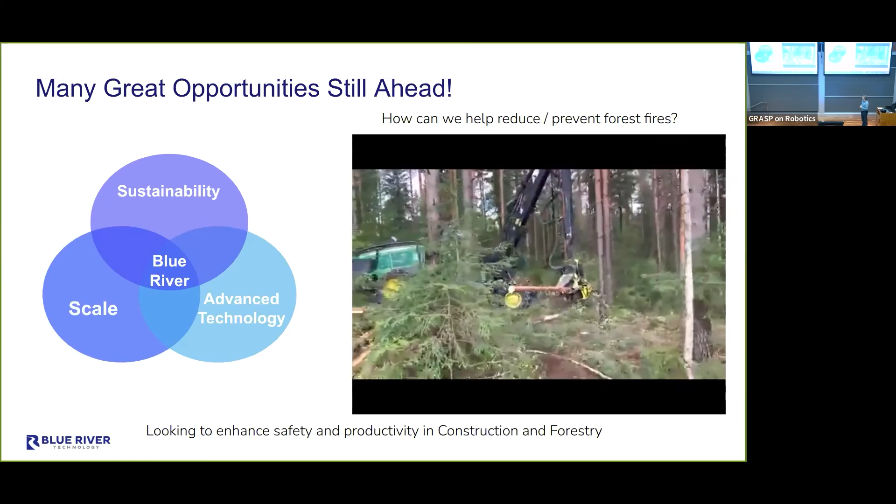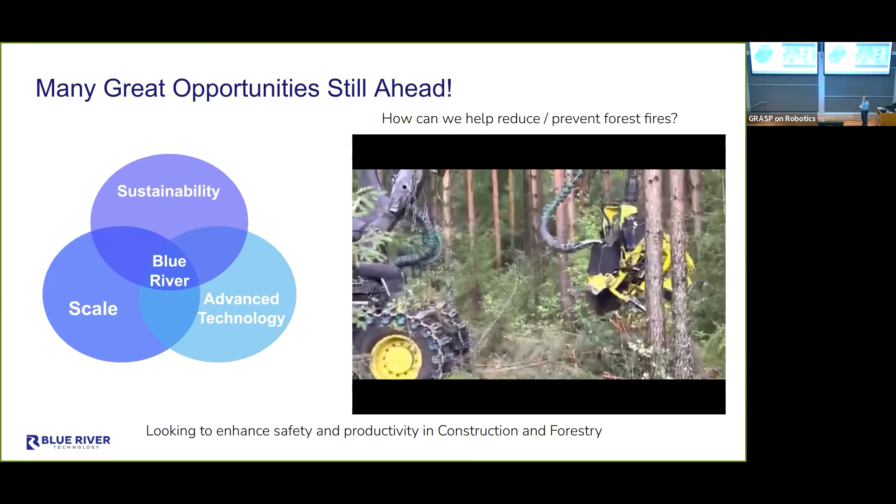I want to show this. This machine is an amazing machine. It's called a feller buncher, that is able to grab the tree, cut it, and then cut to length the logs that can be then later harvested.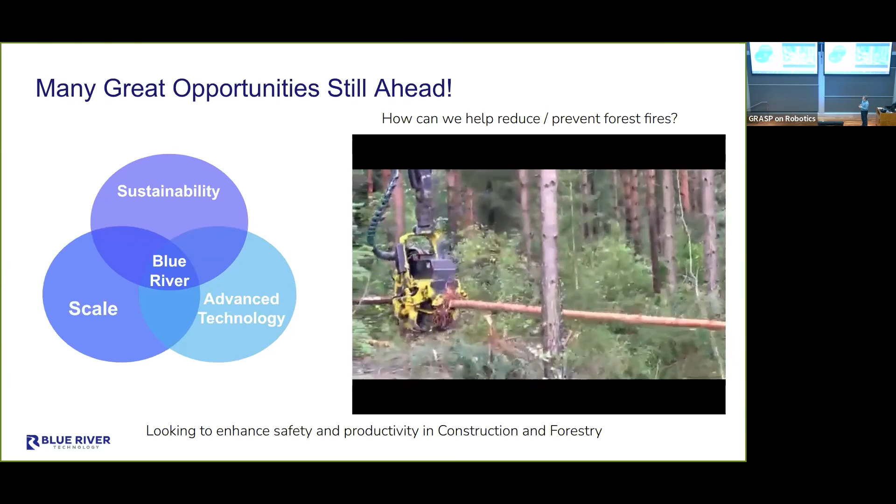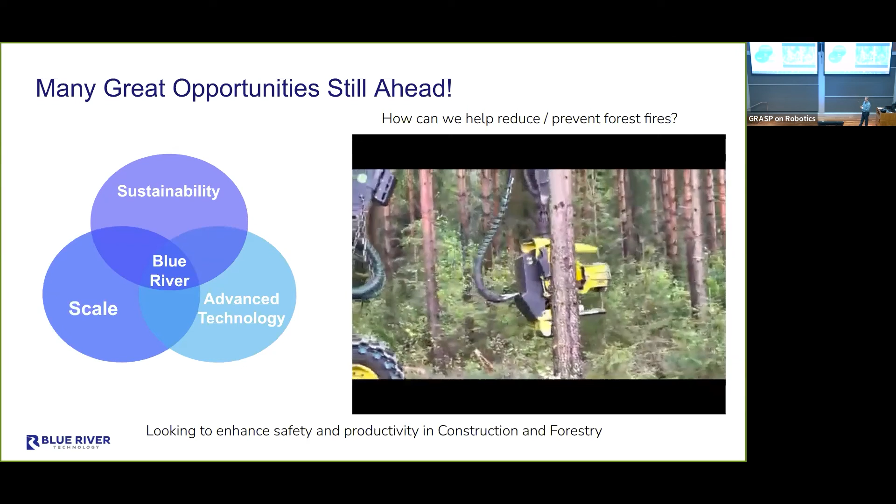But what I want to call out here is, I don't know if this will relate for most people, but I have visions of the Lorax here, and I'm a little bit uncomfortable at times looking at this. But forest management, when you do it right, allows the trees to be healthier, allows them to be more resistant to fire. So we think about forest management more around thinning than clear-cut logging. It's about thinning the forest so that the trees that stay there are healthier.

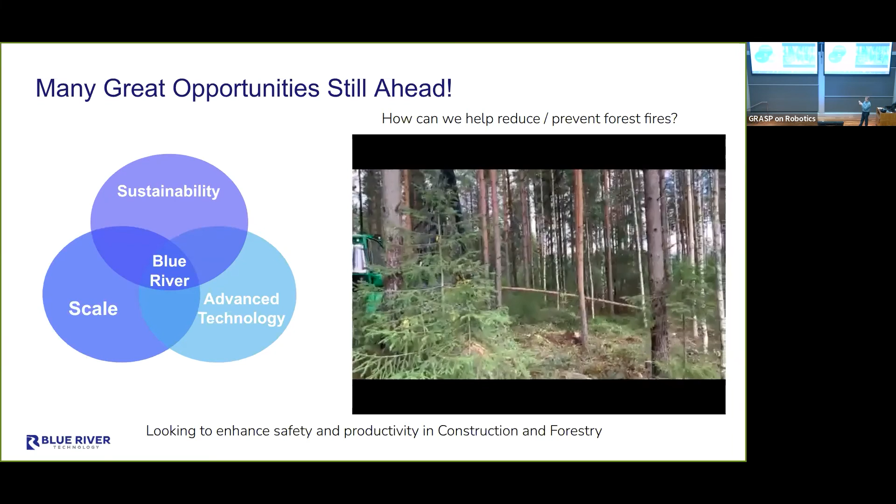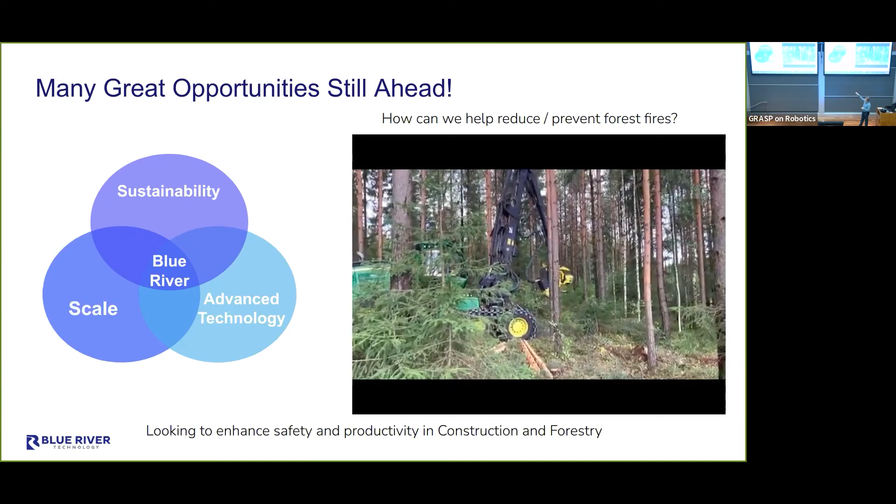And when you do it right, one of the things that's really interesting to call out, you'll see that they'll take the last bit of the tree, the top, and just drop it in place, and they drive over that, and it protects the ground soil underneath, and it compacts the material and starts the regenerative process for that, so it leaves the material in place.

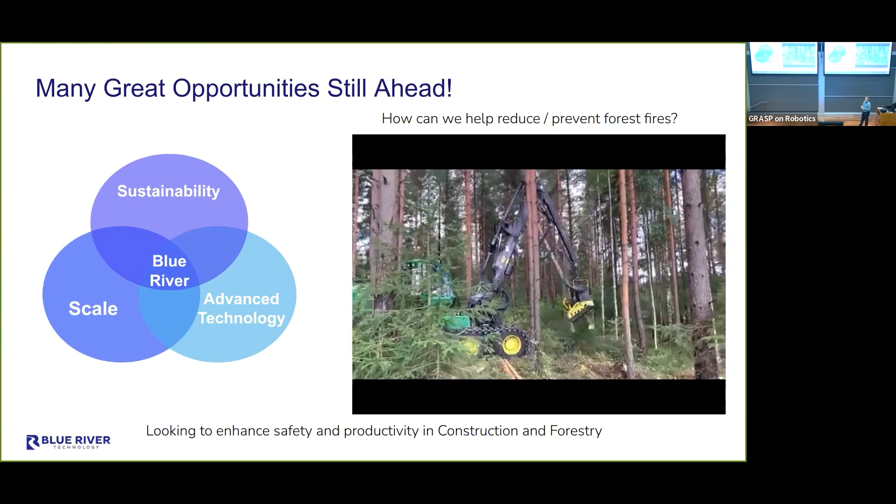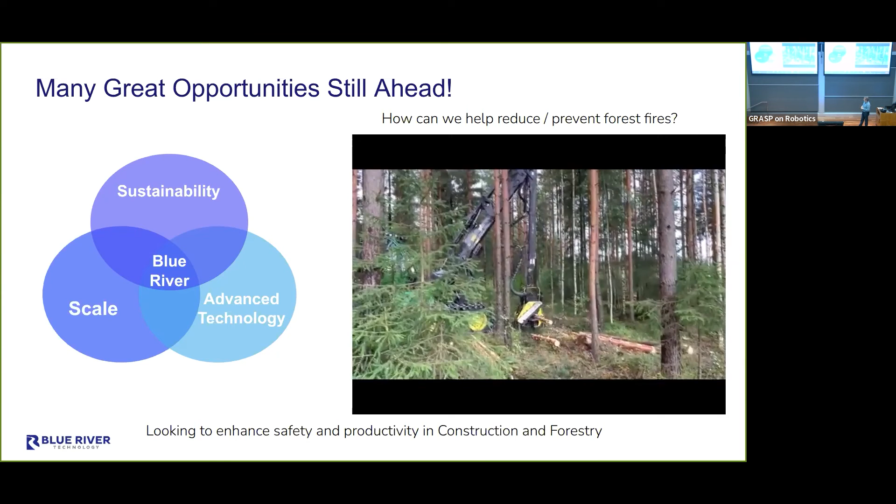So finding good ways to help automate this. Again, labor shortages drive a lot of the challenges with being able to do enough thinning to prevent forest fires. So being able to manage some of the things that go on in forestry. That's really, really exciting, I think, to be able, if we can do that right. And also finding machines that have lower impact, lower footprint on the environment.

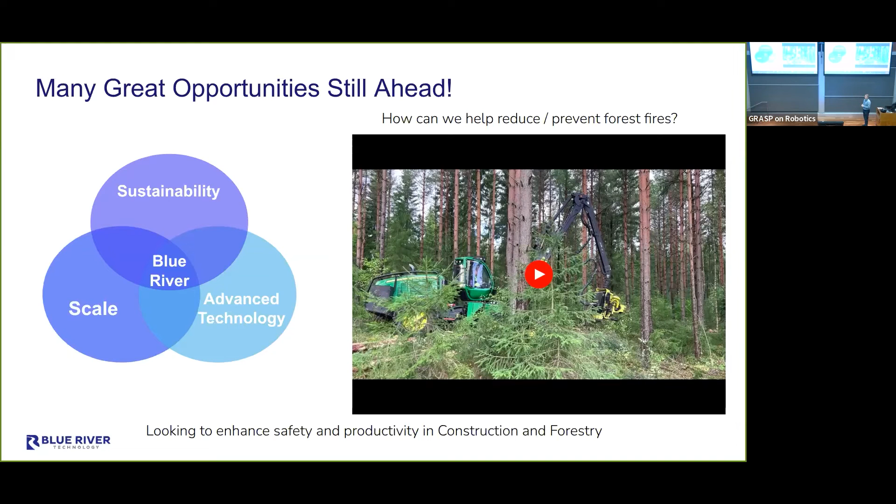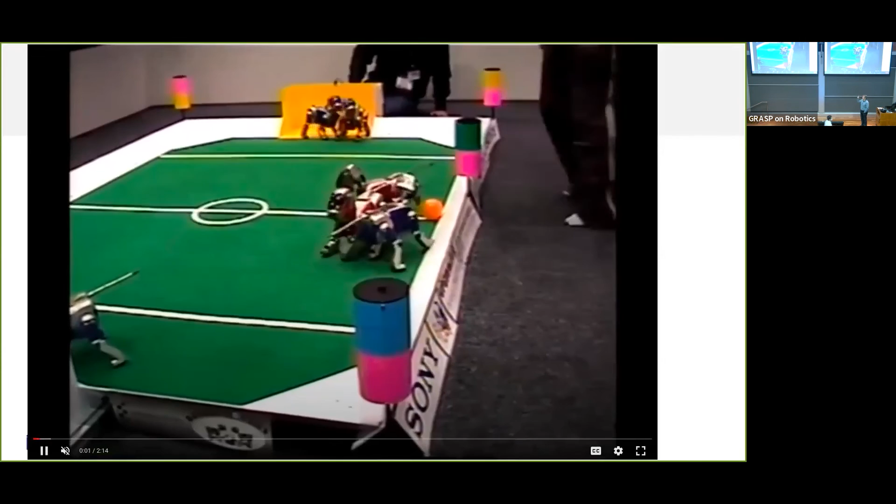Oh, you know what, I'll just let this run in the background. I thought since I'm here, I should show when I was here, we had the RoboCup team, the UPennalizers, which I know still goes, not legged locomotion. But this is us playing in one of our first competitions, I think in 1997, against a team from France. So I thought I'd just play this and let it run. It looks awful in some ways, I kind of cringe a little bit, but it was amazing technology in the day. It shows you how much things can advance. I think they're in the display case. Are they? Yeah, oh awesome. Great, yeah go ahead, I'm just going to let that run.

Thank you. So, are there questions from the in-person attendees? And if not, okay.

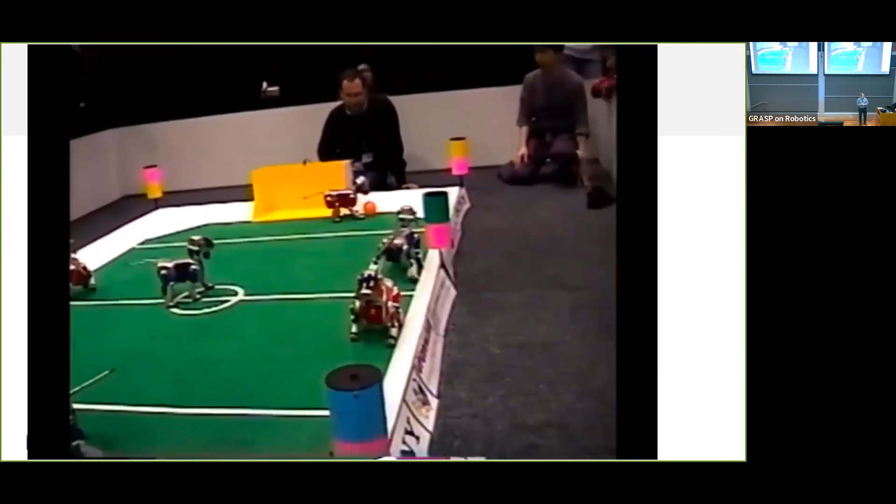For the RL component, how much real world data did you need to collect to make that happen? Not much, yeah, it was surprisingly limited. It was done in roughly a day, a day's worth of data collection. There were various things we had to change and tune when we realized maybe we didn't have the right sensor or the right location, but very little data to get that model going. And then obviously once you get your model good, the training is all offline.

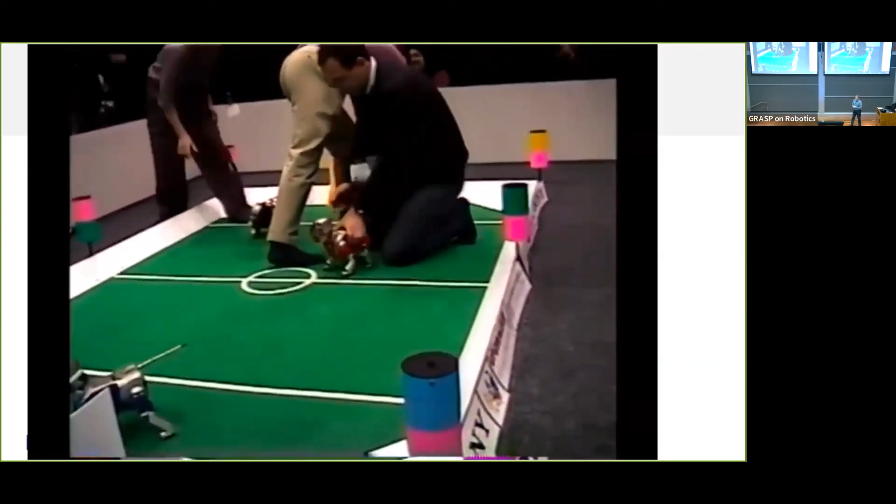For training that model, did you have to have some manual operator performing those kinds of tasks? Yeah, so interestingly enough, we didn't. We were able to do all of the things we needed to train the model effectively on the ground. We balanced it up also and did some work with it static. But yeah, we didn't have to have it driven around inverted or balanced like that. Yeah, it's good.

And I don't know if anybody remembers Avik Das. He was the cameraman on that one. He was a GRASP student also.

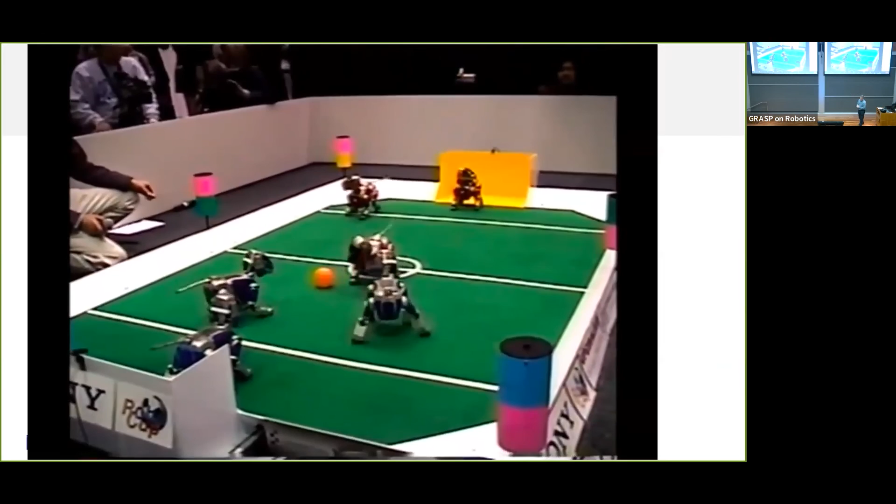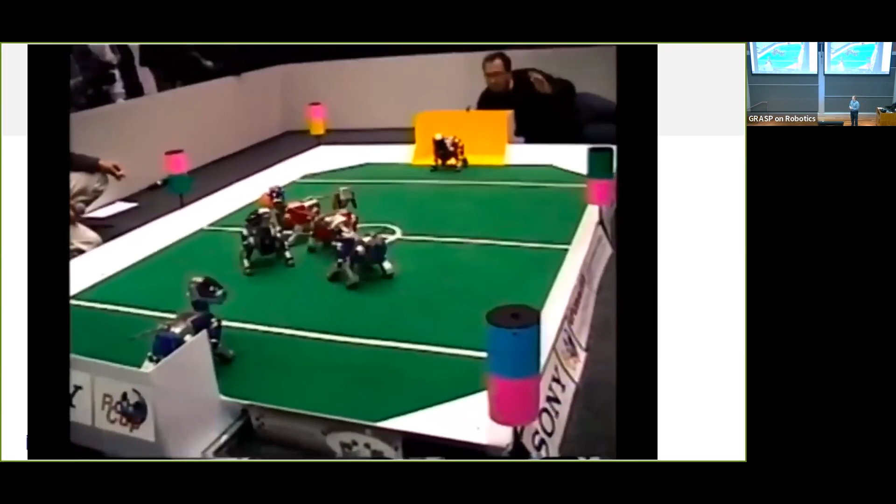You said that data collection is very geography specific, crop specific, application specific. So you're focusing on a few crops, say in the US. Is John Deere or Blue River Technology considering partnering with other companies in different countries so that you can collect data, so that over the years you can scale, because data collection can't happen overnight? So are you guys considering trying to partner with other people outside? Yeah, I think John Deere's scale means that we probably wouldn't end up partnering with other groups. John Deere's a global company, and we're looking to put these systems on John Deere platforms, so wherever they are, that's where we want to be. But that does mean global, and so it means Europe, it means Asia, it means Australia, it means South America, even machines in Africa. So moving into those regions is definitely key to what we have to do. Yeah, so there's no plans to limit it to one particular region. But I think maybe to address your point, we've got the resources and regions covered - we've got facilities in a lot of these places so we can get people there and get machines there.